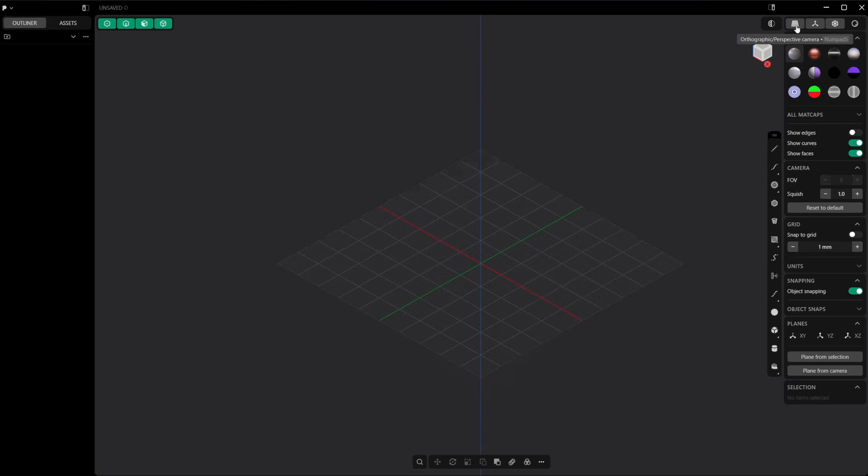Let's make this very simple screwdriver in Plasticity so that we can learn about making interesting cuts that are not planar. As always, first thing we're going to do is set the camera mode to perspective, because I prefer that. Then we're going to create a center circle, and we're going to give it a diameter of, let's say, 4 millimeters. Well, it really doesn't matter.

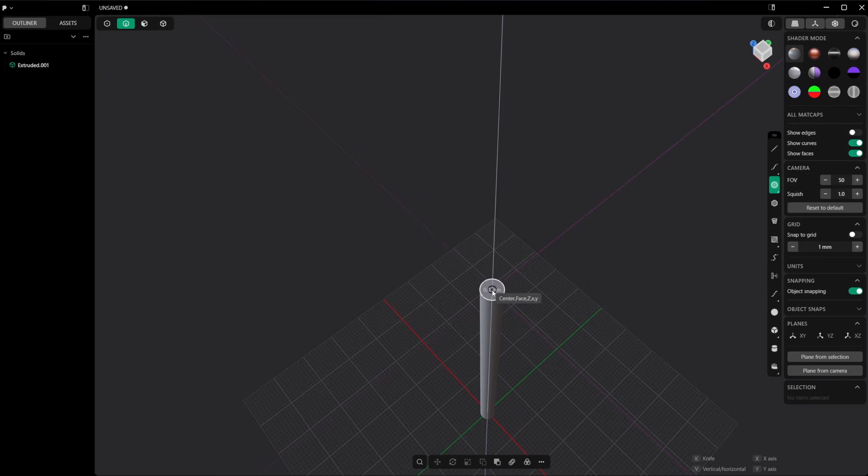Then we're going to extrude it up, and just going to eyeball this. Something like this, probably. Okay. Then remove that. We're going to make another circle on top of this, and we're going to make it, let's say, maybe 20. We're going to extrude this again. Let's just have a look at something reasonable for a screwdriver. This might even be a little too thick, honestly. So why don't we reduce it ever so slightly.

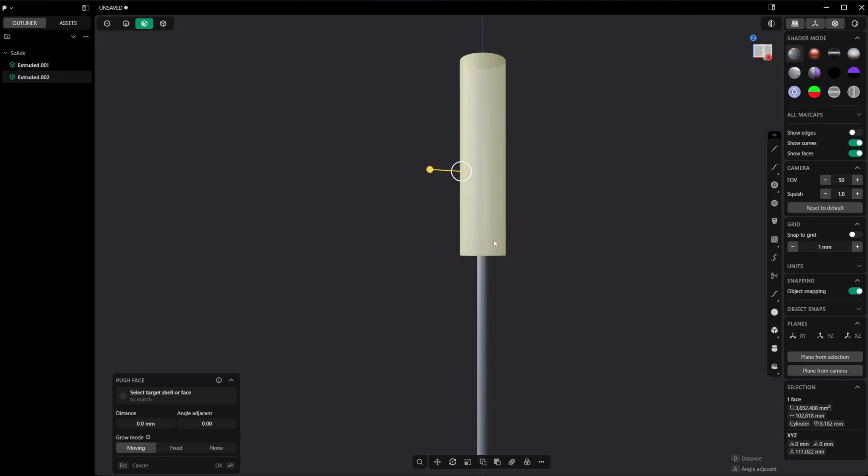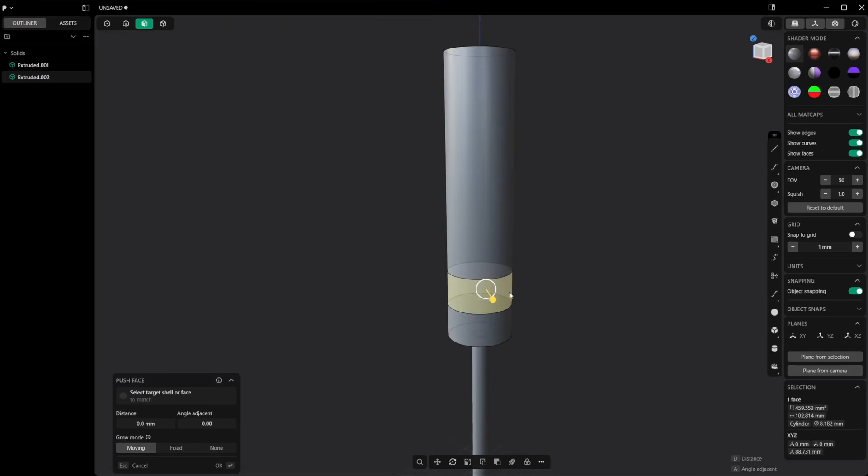Then I'm going to hit Control R for isoparam, and I'm going to cut here, enable edges. If you don't see your edges, you can hit the tilde, and that's going to show them, or toggle this button right here. Then select the top cylinder and cut this one as well. Let's say something like this. Then I will reduce the size here. I'm actually going to remove this probably, so I'm going to leave it as a placeholder. Then I'm going to cut here and here.

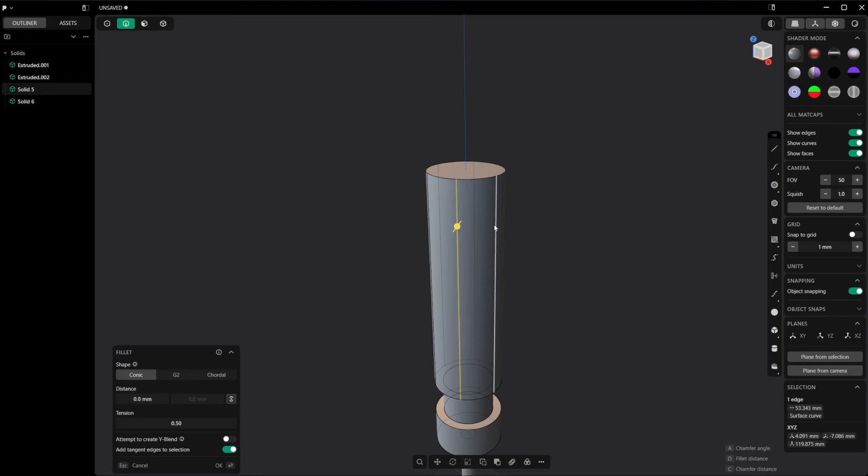And now what I'm going to do is select this one cylinder here, hit Control R, find a point I can snap to on the circumference, and then I will shift scroll wheel up until I get 6. This should give me 6 isoparam lines. I'm going to click to confirm. I'm going to select all of them with Control Alt click, and then I'm going to pipe these. So the pipe obviously is arbitrary. Let's try to see what might look decent for a screwdriver here. Let's say probably something like this.

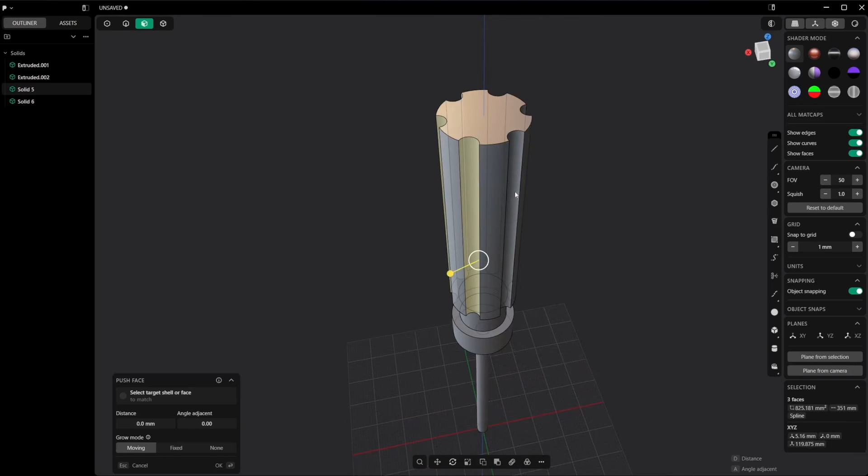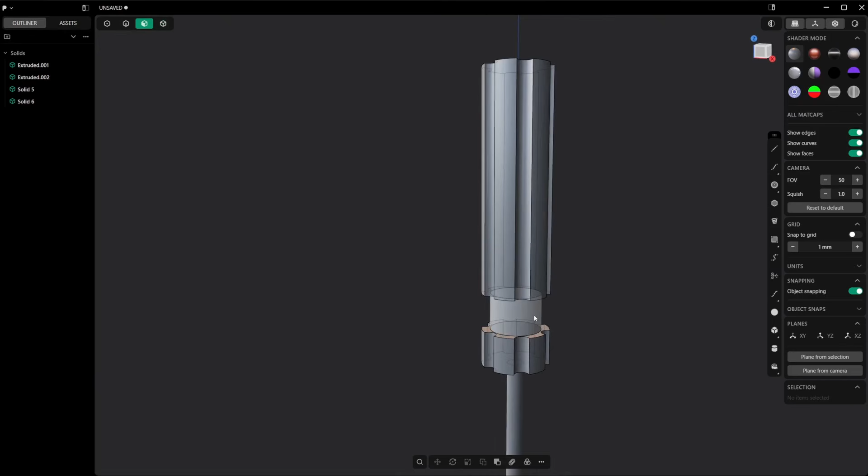Is this decent enough? I also want to cut those lines, the same lines on the bottom. So why don't we select these all? And this is not the only way to do this, but it's one of the approaches. I'm going to duplicate these with Shift D, select the bottom cylinder, and then I'm going to go ahead and cut this non-planar shape out of that. Hit enter. I'm going to remove the sheets, and obviously I want to remove these ones as well. Effectively, we could have done the same, but this is just another approach that I wanted to show you. Let's reduce this one maybe a little more.

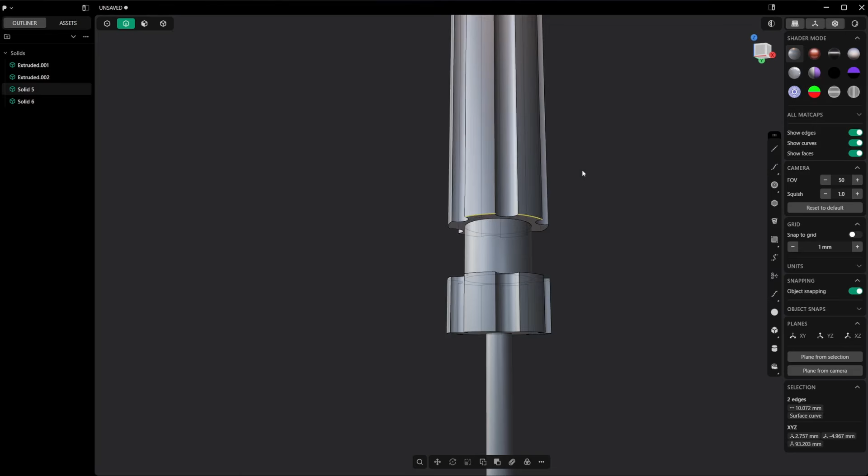I'm going to hit 4, then F and RED to delete redundant topology so that we get rid of those circles on the caps. And now the interesting part is cutting the dome here, and I would say a bevel right here. Because if I use the bevel, well, I can do that, but it's not really going to be what I want. I want to cut the whole thing. You can see it actually glitches if I do this. There. So let's make it a little nicer. I'm going to need a little more space here, so I'm going to make it longer, and we can always change the size later in any case.

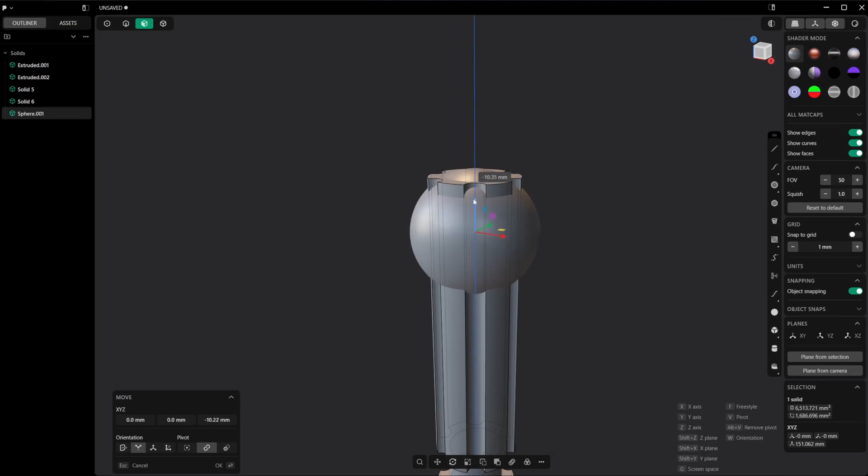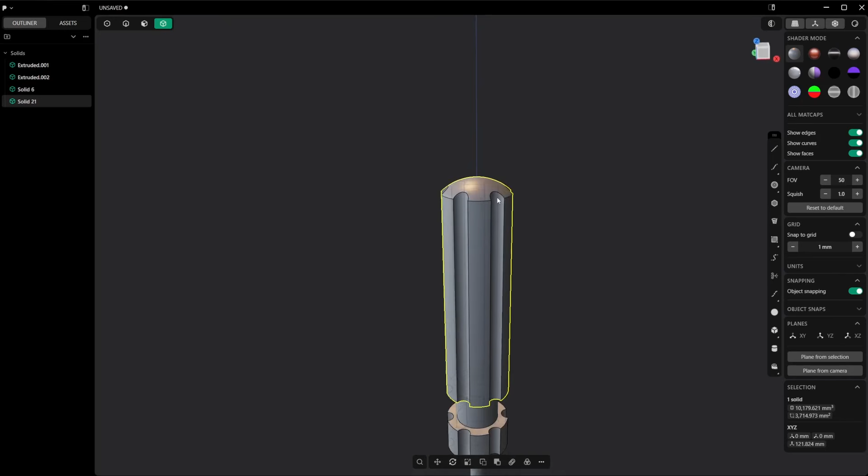I am going to select a sphere and put it here. I'm going to make it just a little bigger than our shaft. Then hit B to create a new form, and then G to move the sphere down. I want to intersect the top here so it's completely inside the screwdriver. Then I'm going to select the screwdriver, hit C for cut, use the surface of the sphere to cut, and hit enter. Then I'm going to remove this. I'm going to remove the sphere, and I have to merge these two again. So QQ to merge them. You can see we got this nice little end of the screwdriver handle.

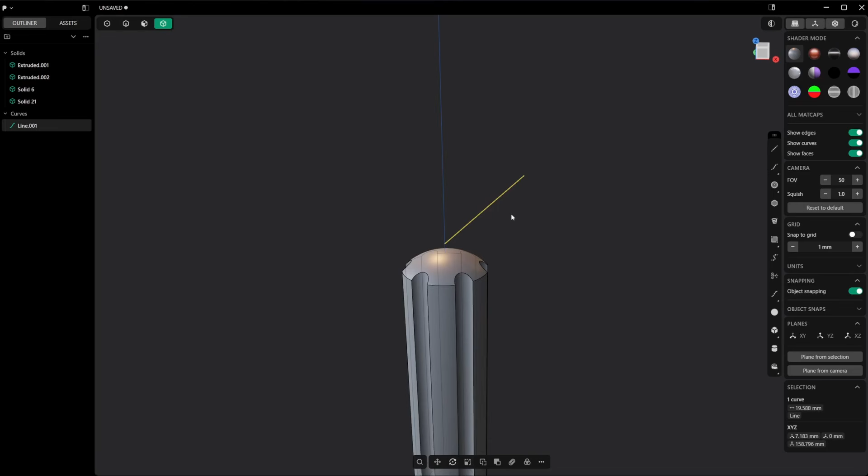What about the bottom? Well, I'm going to use something a little different for the bottom. So I'm going to go back to the top. I'm going to take a line, make sure that I'm snapping to the center. I am going to create a revolved surface. So with that selected, F and then Rev or Revolve. I'm going to select this Z-axis up, and then I'm going to take this new sheet. Actually, let me remove this first. I'm going to take the new sheet and move it down using the handle here. Make sure you move it just on the Z-axis.

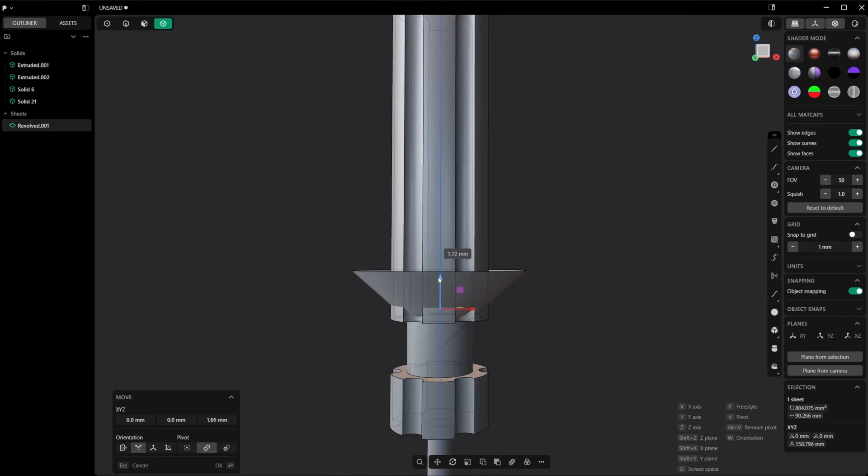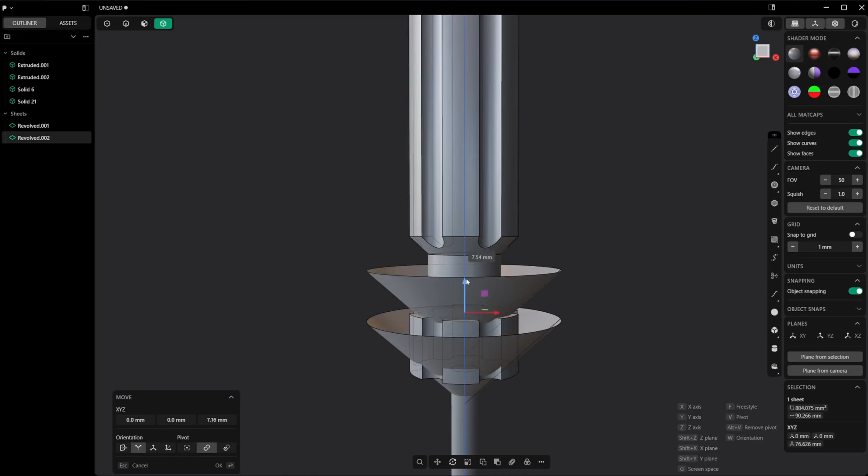Go back here and remove a chunk of that handle there. So I'm going to hit enter to confirm the position of that cone. I'm going to select the handle again, C again, hit that, remove, remove. And I think I'm going to reuse this actually because I want to use it for the bottom part. So I'm going to move it here, something like this. And then Shift D to duplicate. I'm going to move it up. I'm going to rotate this on the y-axis 180 degrees. And if I can see more or less where this goes, let's see.

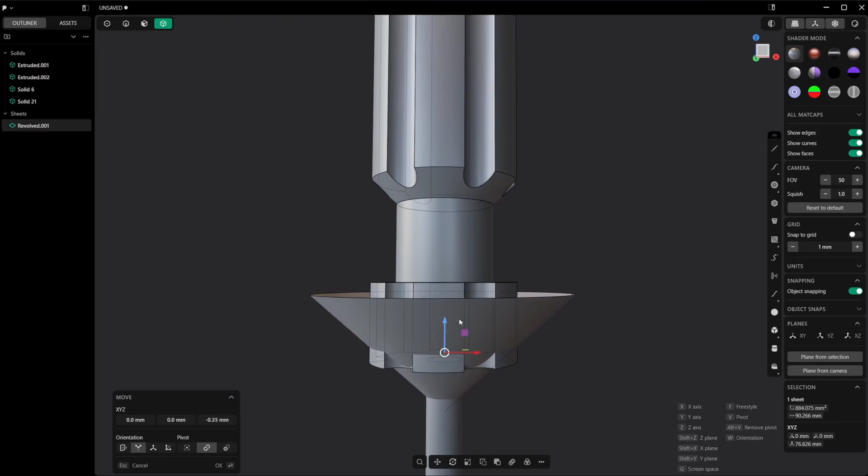We're going to get something similar. You know what? We're not going to do this. We're actually going to mirror that. So let's just cut it right there, or maybe a little lower, something like this, because I don't want it to be too thin. So I'm going to select this, cut it again, and remove that. Remove this. Now I'm going to select this face and this face, Shift Space to create a new mirror plane, and now Alt X to mirror it.

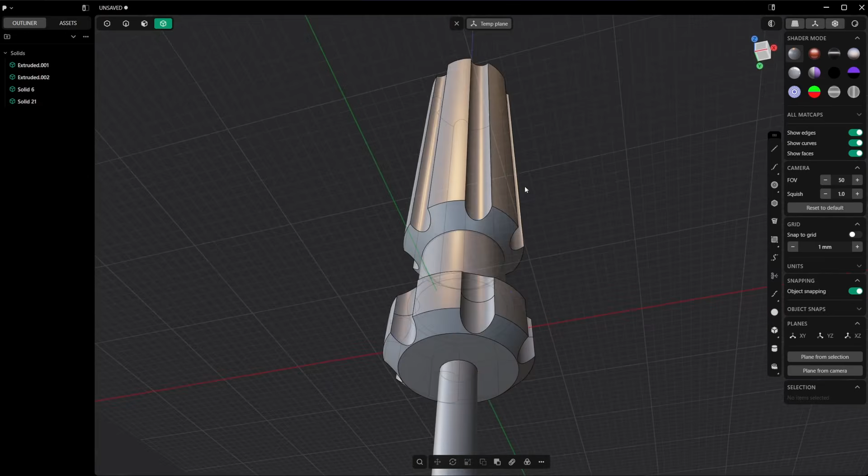I am going to select this bottom axis, hit Q to merge, and enter. Let's see if we can remove the redundant topology. Apparently not. So this one is going to remain, but it's not a big deal. I think it's decent enough. We can probably actually increase the size ever so slightly to something like this.

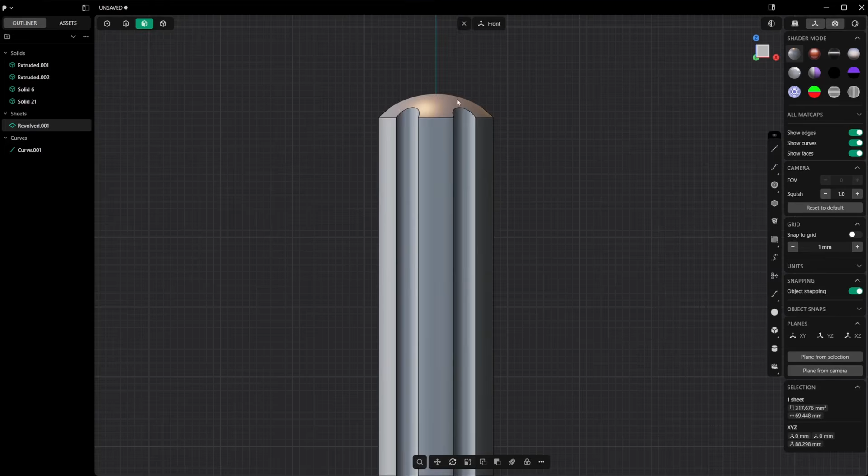And for the center part, I actually want to use something slightly different. So let's see, why don't we try a slight curve like that. Let's revolve this one as well. So F rev to revolve, select the z-axis, go up, and we got that one. I'm going to select this one, period, to solo this, F patch. I'm going to patch those sides just in case.

And then I'm going to give it some lines here using isoparam again. I can see that I probably want to move this down a notch because it's not touching. So let's see, something like this. There. Wherever it's touching, something like that, so it's not too visible.

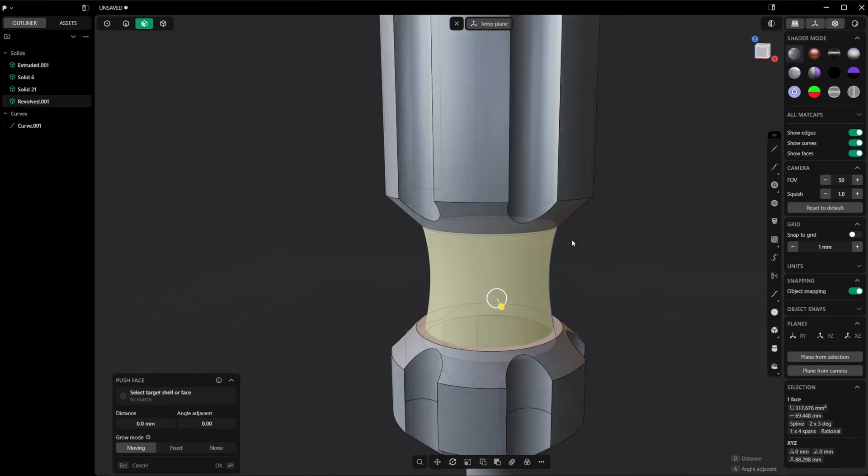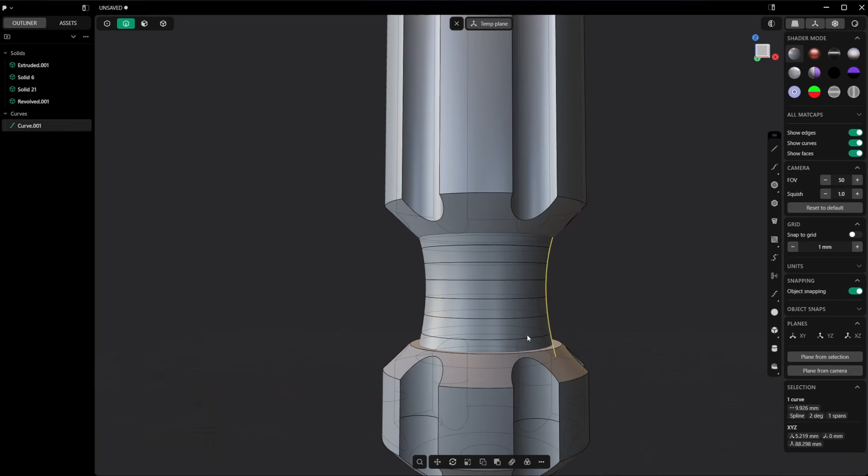So I'm going to select this one again, select the face of this sort of squished cylinder, Control R to isoparam again, and then Shift scroll wheel up. I'm going to give it maybe six lines. Let's say something like this. All right, pretty good. I'm going to select all of these, making sure I select the correct one because this one was being selected, the back one. Make sure you are actually selecting the correct ones.

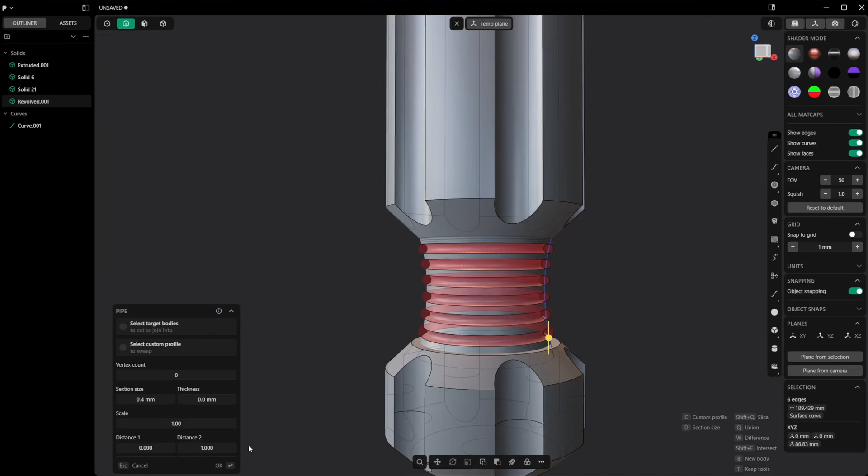P to pipe, and it's going to be a bit of a mess now, but I'm going to reduce this to 0.3 or something like that. And I think maybe even 0.4 will do it. Hit enter, and it's pretty much done. So let's see how it looks without edges. I think it looks pretty good.

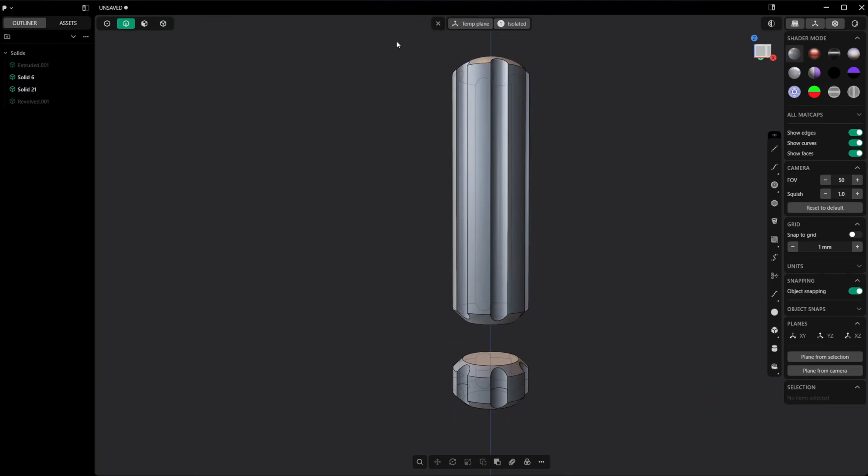So I am going to make all these edges a little softer for this one and this one. I'm going to isolate them. Let's see if it looks good with something like a 0.4. I'm going to select all the edges, hit B and D. Let's see, 0.4. It's probably going to look good. Let's remove that. I think it looks good enough. Maybe we can make it a little more. Let's say 0.7 to make them a little softer because it's plastic, something like that.

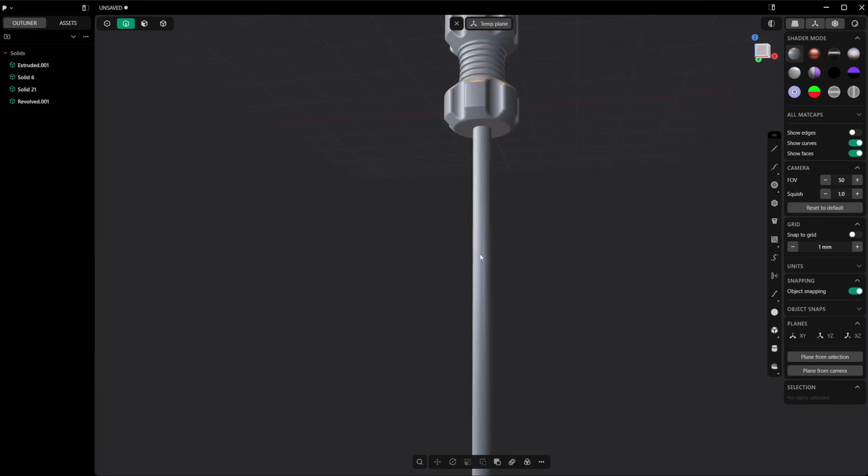Pretty good. And now we want to cut the very end of the screwdriver. So first I am going to make a sort of a cone here, a curved cone. So I'm going to start here. I'm going to go out a little bit, something like that, because I want the bit to come out a little. I'm going to revolve again. So F revolve. This is basically a revolve tutorial in case you didn't notice yet. So something like this. Select with 4, F patch. I'm going to patch that.

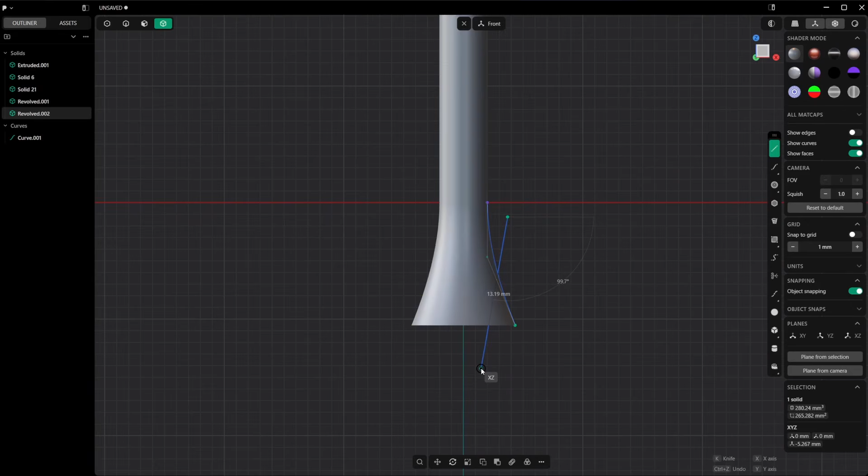And now I want to cut it. The way you cut it doesn't really matter. I think for this one, the bit is going to be flat on the other side. So maybe something like this. Let's move this probably here. Alt X to mirror. Select both and cut this one. Remove those. And now for the other side, I'm going to make it really flat, obviously.

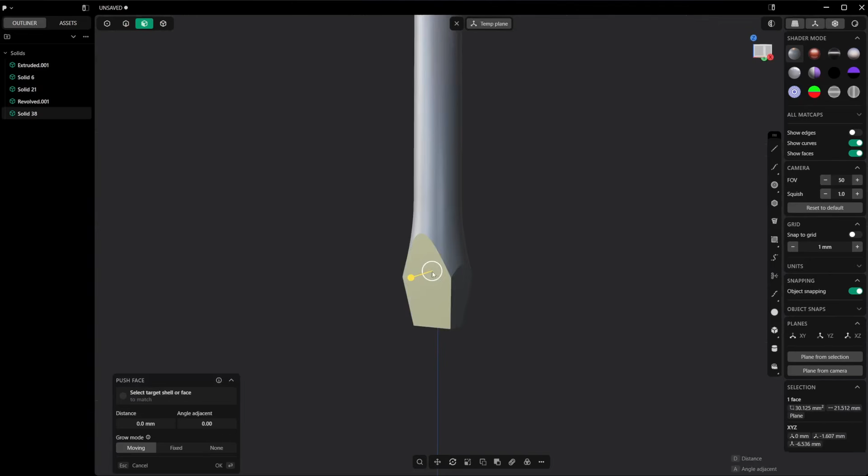So let's start maybe around here and go to a point around here. Alt X again, mirror, select both, and cut. And there you go. Now make sure you don't erase the base one, like I was about to do. Erase this and erase this. Now if you want, obviously you can always change this a little bit, make it a little more pointy. Something like that, and maybe even a little longer.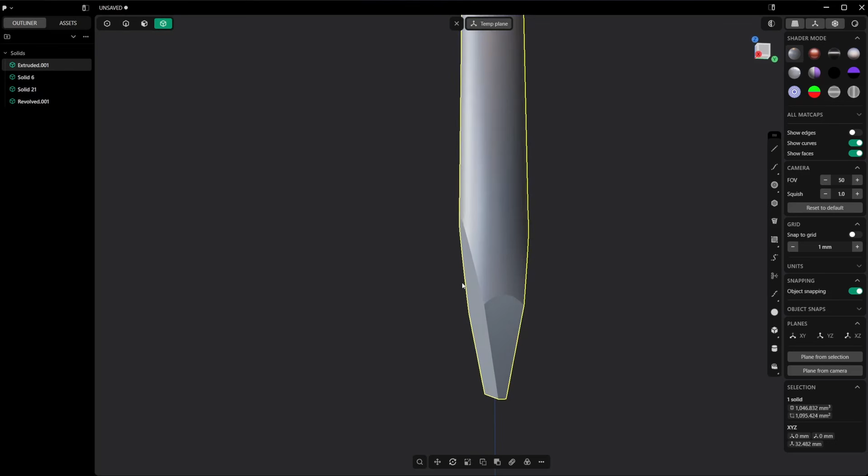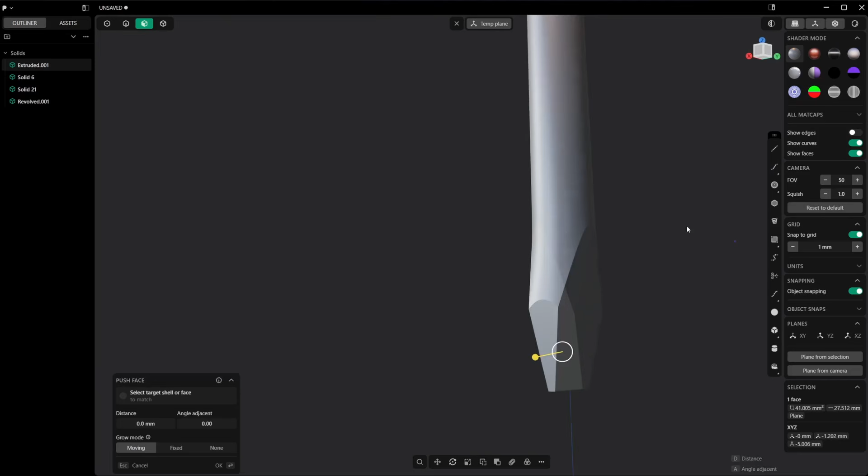If this is not tilted enough, you can always R rotate and move it a little bit, but you can see obviously at this point, if we don't merge these two, it's going to change the way it looks because it's going to inset there. So let's see, let's move it by snapping to the grid. I'm going to make it a little more flat because I don't think this is enough. So rotate, this is way too much. Let's say 1 degree there, and then rotate with R again, this by 1 degree. There you go. All right.

And let's see how it looks with the renderer, actually. That's pretty good. So this is our screwdriver.